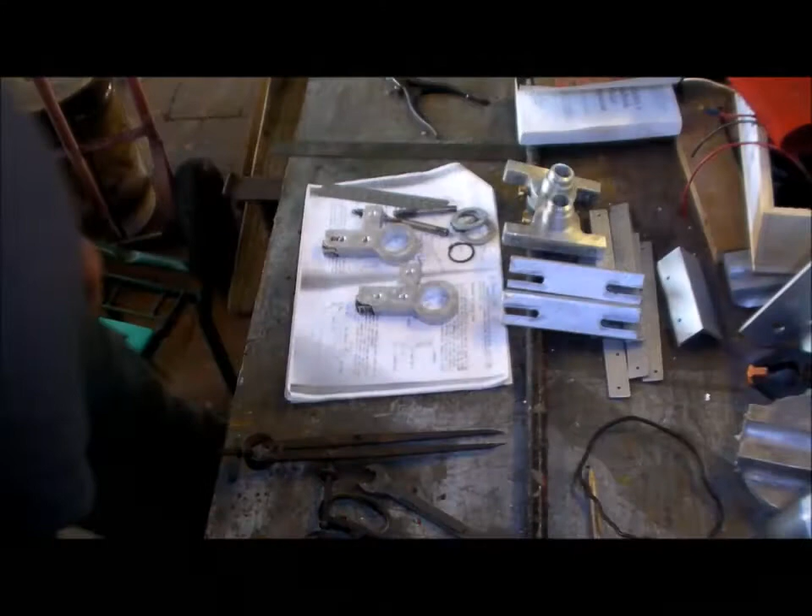Before we go on too far, these two release cranks, they're not quite finished. So before I go back onto the steel transmission levers and whatnot, I'll go back to these release cranks. First off, the holes. In the drawing here, he has 3 holes. One of them is the centre hole for the bore, and then the other 2 are to bolt this to a faceplate, so this can be bored out. We've already done that, been through that process.

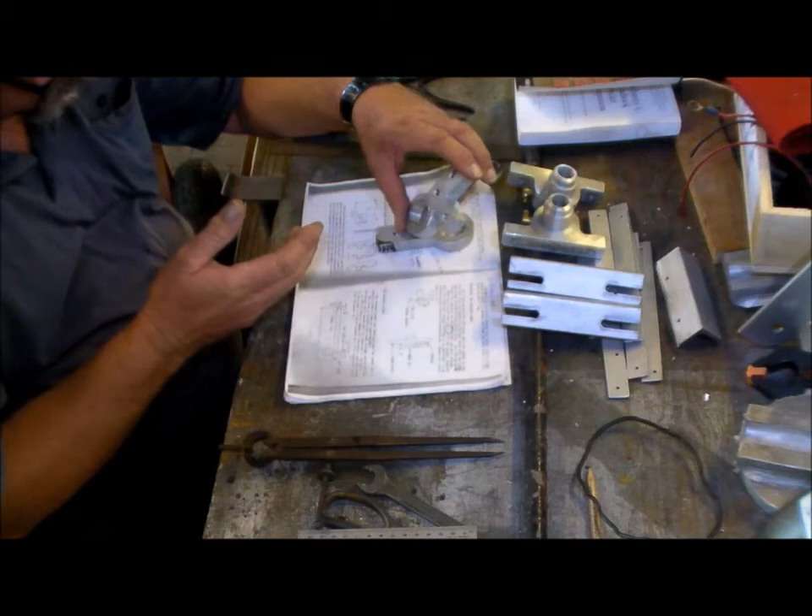What he doesn't show, but he does mention in his text a bit further on, is that there's another hole off to the side of this leg that needs to go in. These are supposed to be 5/16. I've made them quarter because I've got a heap of quarters and I couldn't see a disadvantage of making them quarter. If I need to make them 5/16 later on, then it's a small job to drill and re-tap. So this hole is not in the drawing, so that needs to go in. I put it in at the same time as I did all the other primary drillings, 1/8 drillings. I put this one in.

Now, in the drawing, it has an arrow going to that middle position, and it says tap 5/16. So later on, I think he mentions the other hole at the end is 5/16 also, but remember at this present moment these 2 holes are to bolt it to the faceplate so you can machine it off and do the centre.

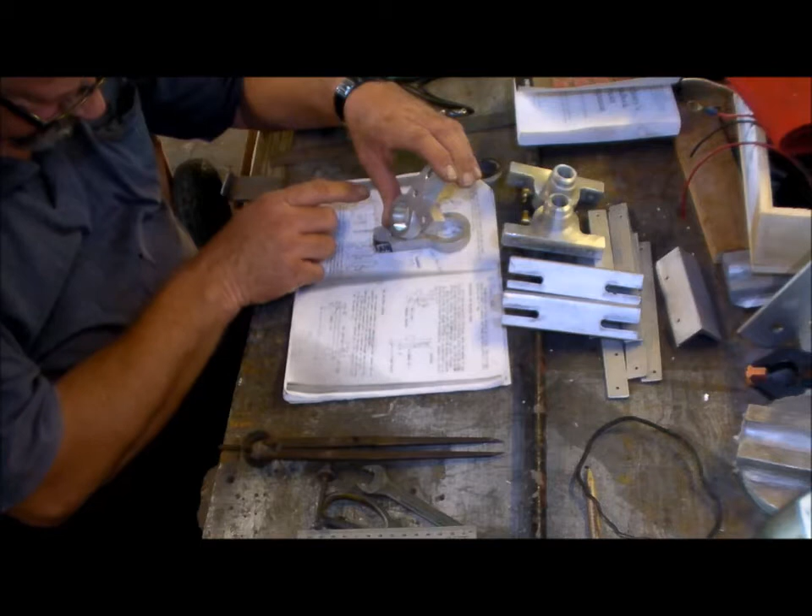But later on he shows that this top hole is going to be 3/8. It's not in the drawings, but it's in the text. And then in the text also he shows the end of the leg being ground off to a 1/2 inch radius so that it can clear, when it pivots, it can clear the top of the angle.

Yep, and that's how he gets the over centre also. There's a pivot here, and then there's a bolt for adjustment here, and then if we're looking at that, can you see that? We're looking at that. It's bolted through this 3/8 hole here. This is the motor frame, we'll say. I know it isn't, but we'll presume this to be the motor frame.

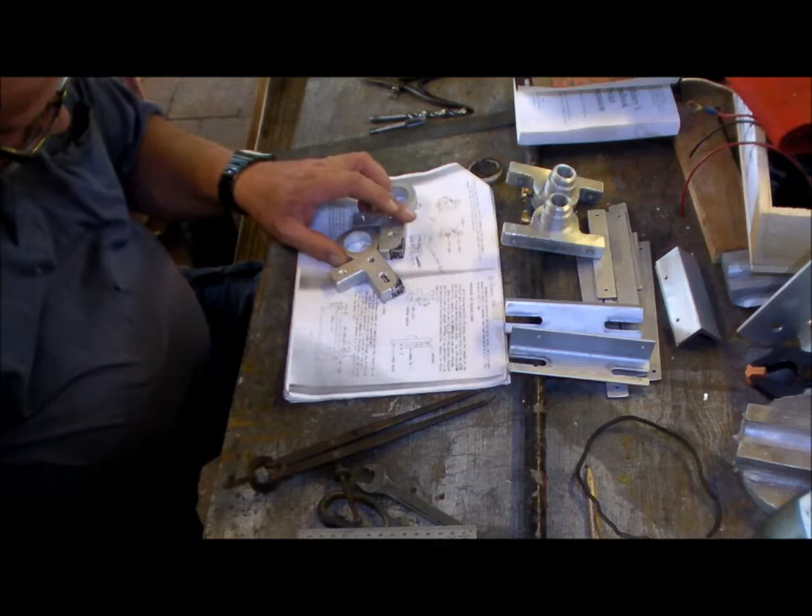So when this lever is moved like that, the top edge has to clear the underside of the motor frame. The reason I'm pointing this out is some of these things are in the text, they're not in the drawings. So realise that these are 5/16 holes, all 3 of them, then at the end, 4 of them, the one here in the middle comes out to, in my case, a 30 mil. These remain 5/16, and then this one goes out to 3/8 for the pivot bolt, and then radius off a 1/2 inch end. Alright, I'm off to file the 1/2 inch radius and take these holes out to, in my case, 10 metric, M10 3/8. Alright, catch you later.

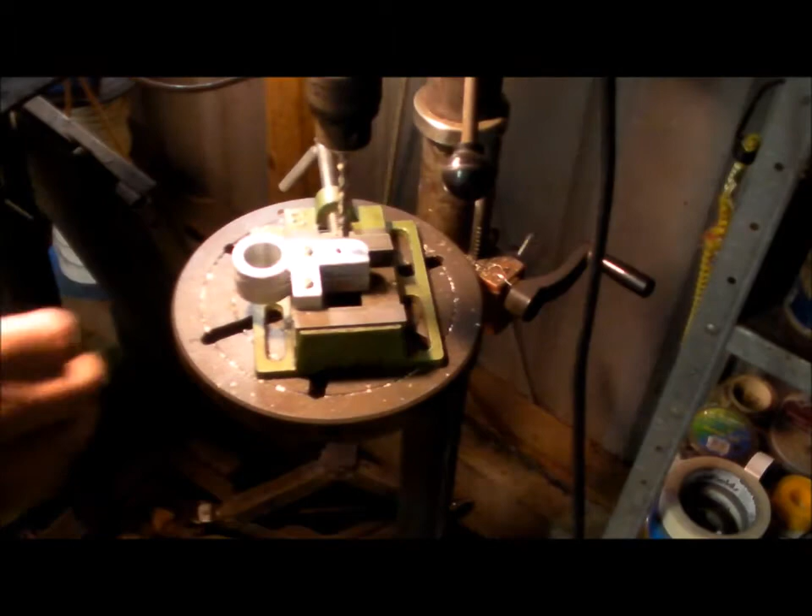Alright, go and check that. I forgot to tighten the chuck. That should work better. Yes, I know this drill is running too slow, just can't be bothered to change the speed. There we go, doesn't take long. That's the one.

Going to try my hand at power tapping, but I think we're going a bit too fast for it, but we'll see. The belts won't do it. I'll go and finish this off in the vise. Okay.

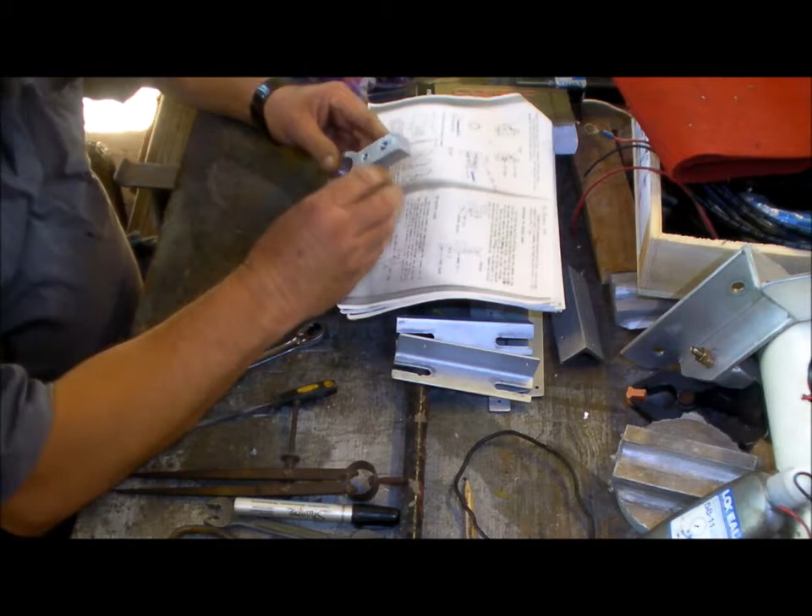I've noticed, well, first thing what I've done is I've radiused the end off and drilled this hole out to an M10 for 3/8 M10. But what's concerned me is that was supposed to be, it's a half inch in. Although I did bring that in half inch. Yeah, 12.5 mil, thereabouts, more 12 mil on that. That's 12.5. But a slight discrepancy here. You might not be able to see that. Try that. Can you see that?

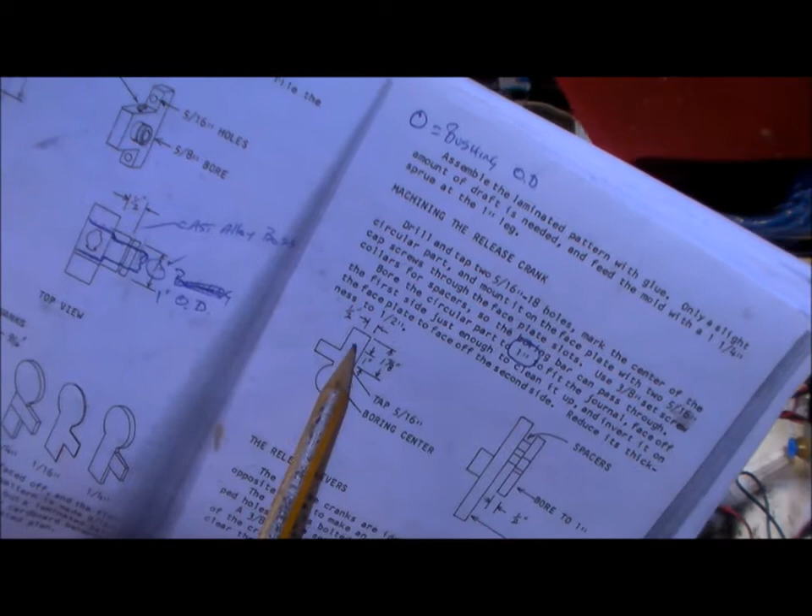Where is it? If you see, that's 1 7/8 inches to the centre hole, and then 1 inch back to the end hole, which should leave 7/8 of an inch there.

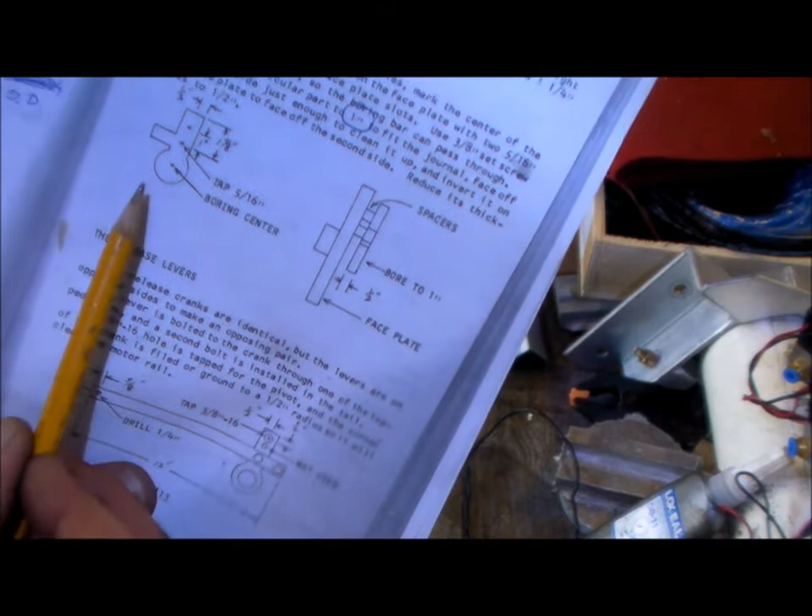Have a look at this end. It's 3/8, 16, that's the crank there, 2 holes. So it's mirror image of the other one we just saw. The end hole is 3/8, 16, half inch in. We're referring to the radius now, I suppose, and then he's got a half inch down for that radius. Well, that hole is 7/8 from the end, not a half inch.

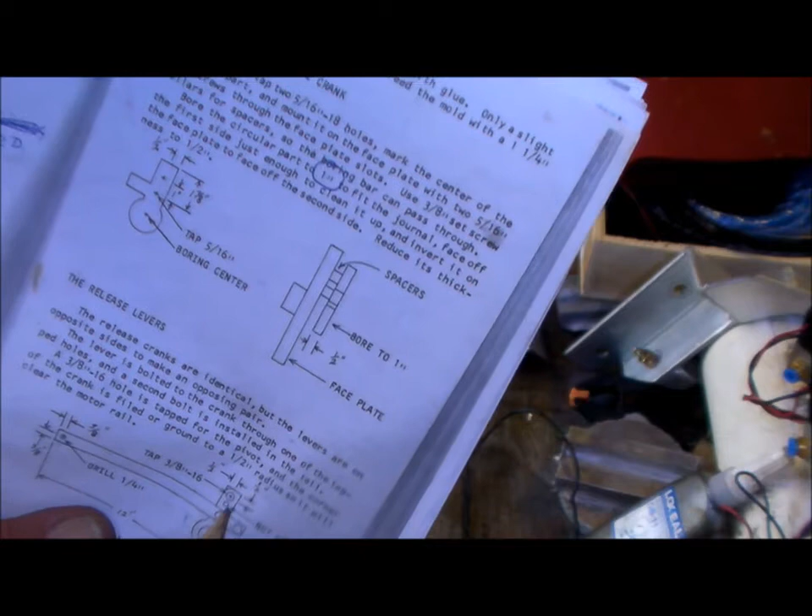So that's a fair bit of difference. So 7/8, that's 3/8.

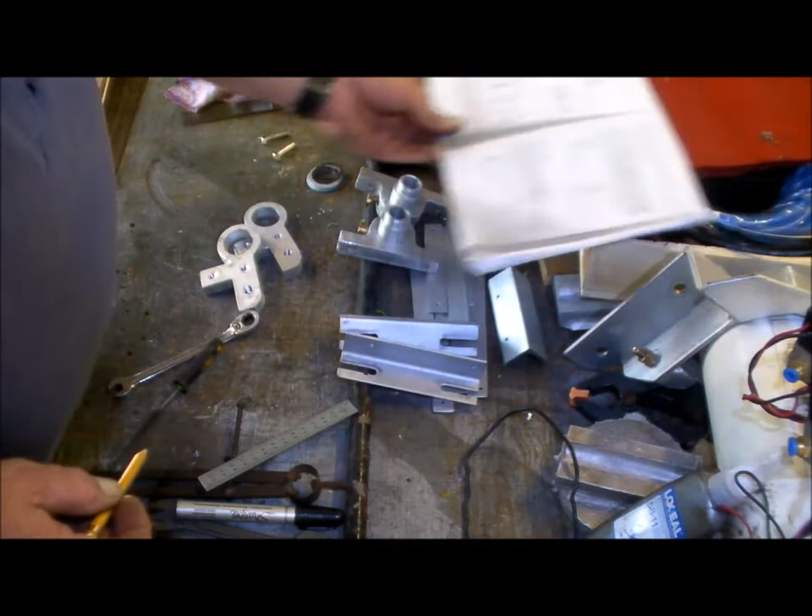I might leave it to see how it clears with the motor rail. If it doesn't, then it's an easy fix.

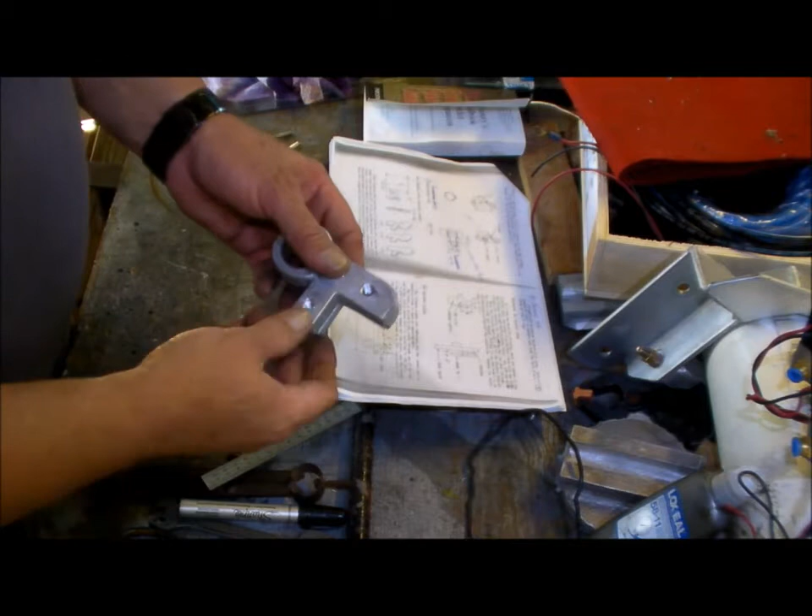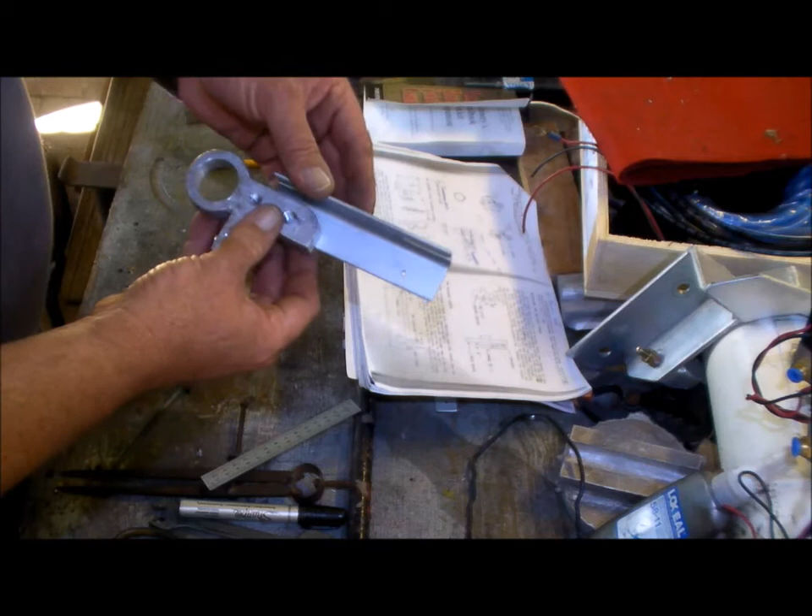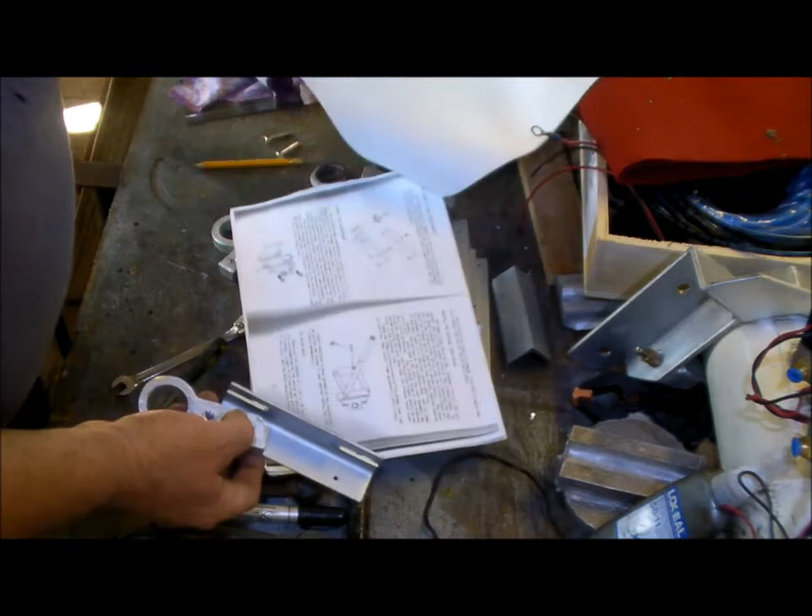Where are we? Come back again. Yeah, as I think I may have explained in the last video, the transmission rail will come in something like that, and then this pivots. So depending on the position for that, which is half inch up, 1 inch in.

Let's have a look quickly. Half inch up, so that's 12.5 mil, 12.7 to be precise. 1 inch in is 25.4, going to be about there. So that's going about there.

Not going to fit. It may, I don't think it will fit. Well, it's definitely not going to fit at an angle like that, but I don't think it's going to go anywhere near an angle like that. Currently it's going to go to about there, to about that angle. Now that's enough to loosen the belt off.

So I'll see how it goes. If I don't like it, I can always trim the back end of that off, I think. Well, I can, but whether that's going to work with the rest of the build, I don't know yet. But we'll plod along as it is at the present moment. The other measurements are right, so we'll see how that goes.

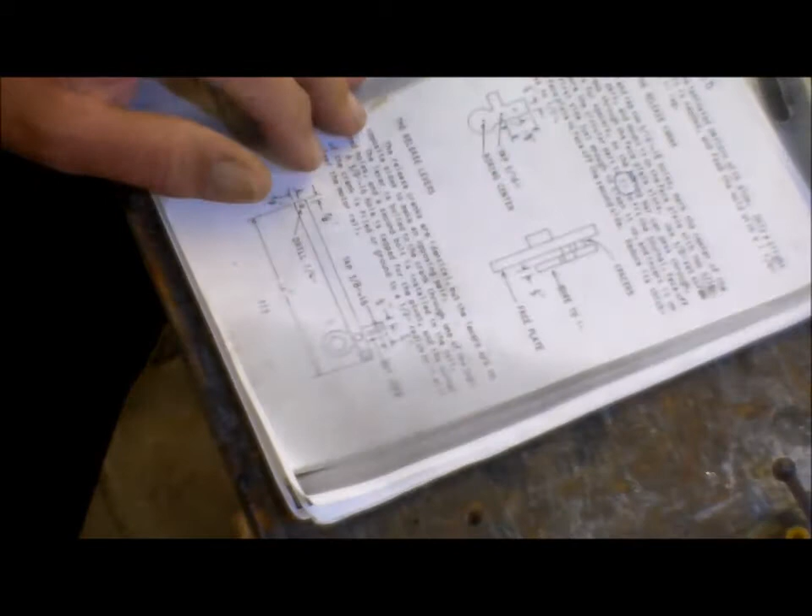I feel, I reckon, start again. I find a discrepancy in this, in the book, working on these release cranks.

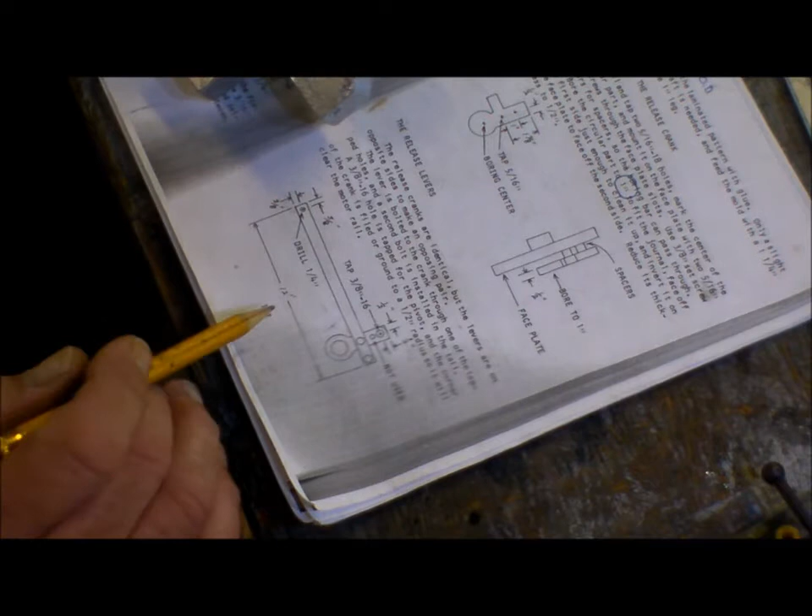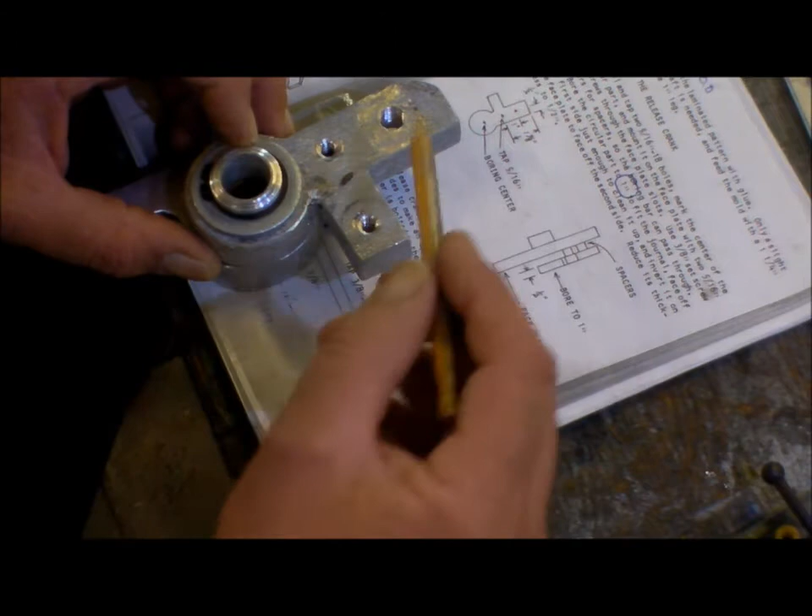The radius that is showing here, this radius here, is, well, it looks like he has it coming in at a half inch from this left edge. So from there, from that side, half inch in, and looks like a half inch down, which gave me a reference point of here.

But having said that, okay, I'll go along with that for the present moment. But up here, this crank, the measurement for the middle hole, this one, is 1 7/8 down, and then the pivot hole, which is the one above it, is 1 inch up, which leaves 7/8.

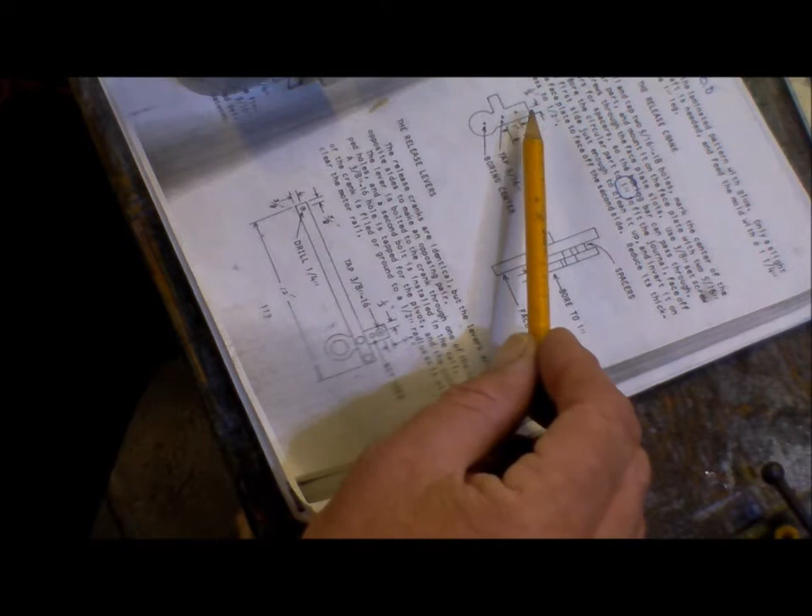Now that's going to be, and this leg is 1 inch wide, so the hole is in the centre of the leg, and so that's half inch, which means this hole is in the middle of the leg, half inch, and 7/8 down from the end.

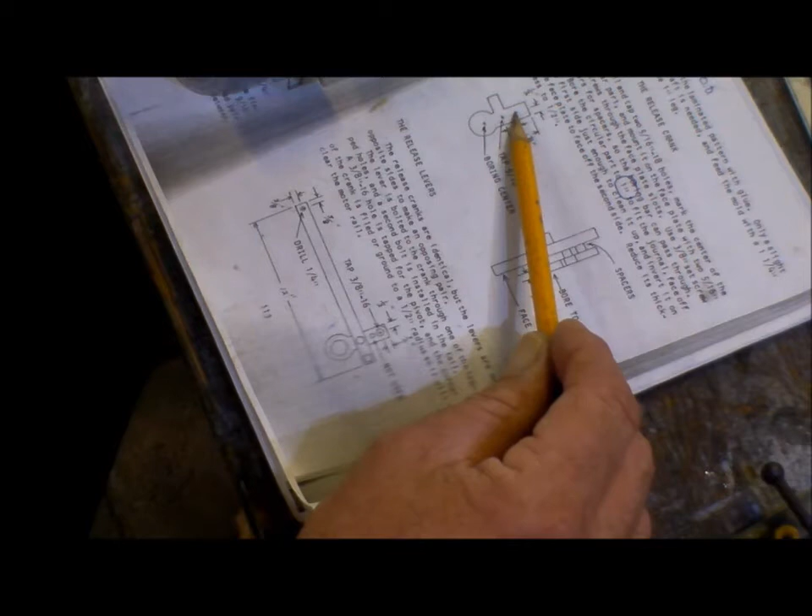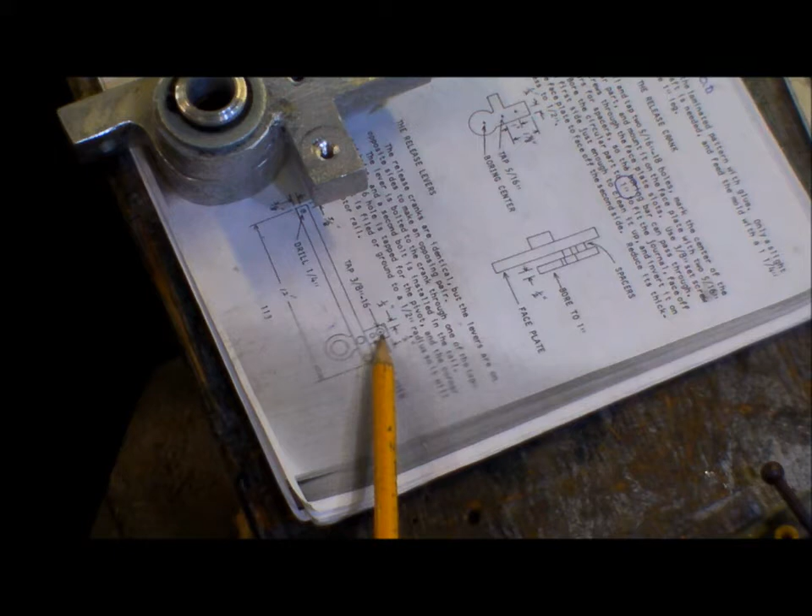But the radius that he wants is half inch by half inch. Well, we have a 3/8 of an inch difference, and if you see here, it looks like the radius is from the drilling position. So we have a 3/8 of an inch discrepancy in this part here.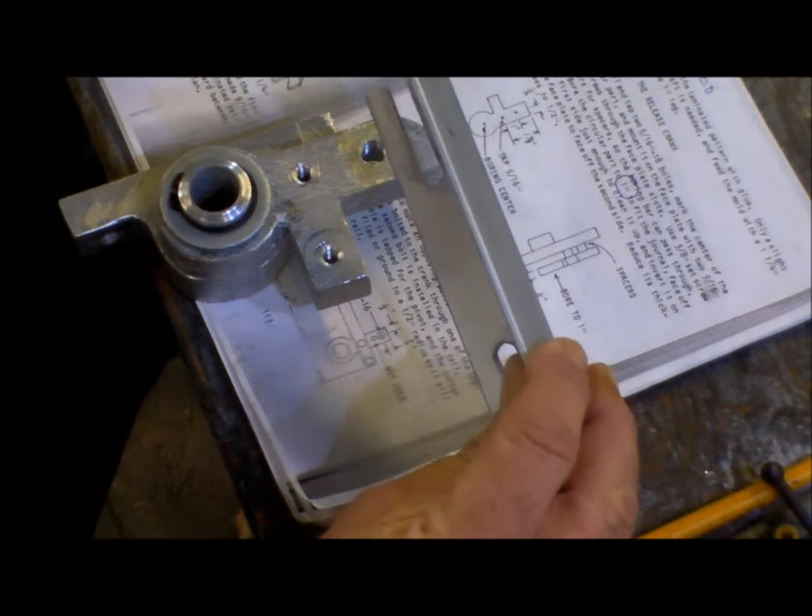Now, this isn't the motor rail, but this is the material of the motor rail, and the pivot point for this bolt is half inch up from the bottom edge, and that slot is a half inch up from the bottom edge. And the motor rail, it's going to sit that way.

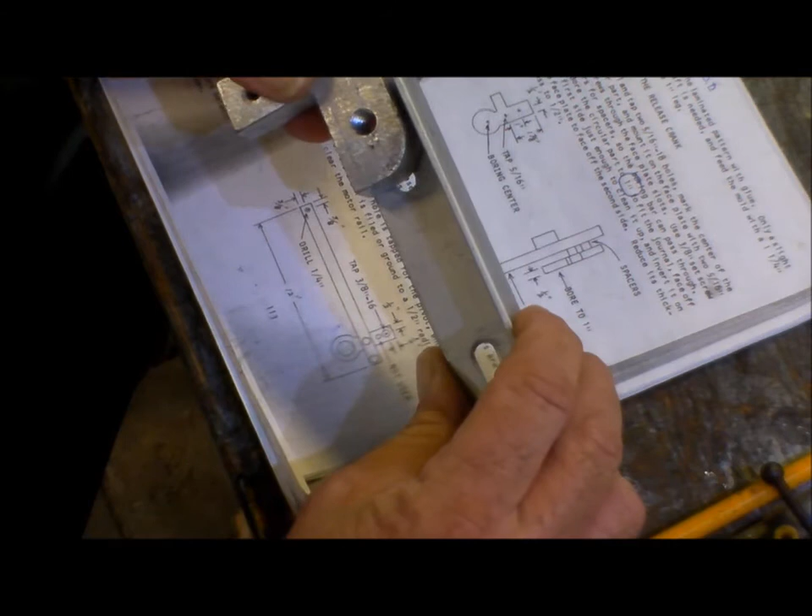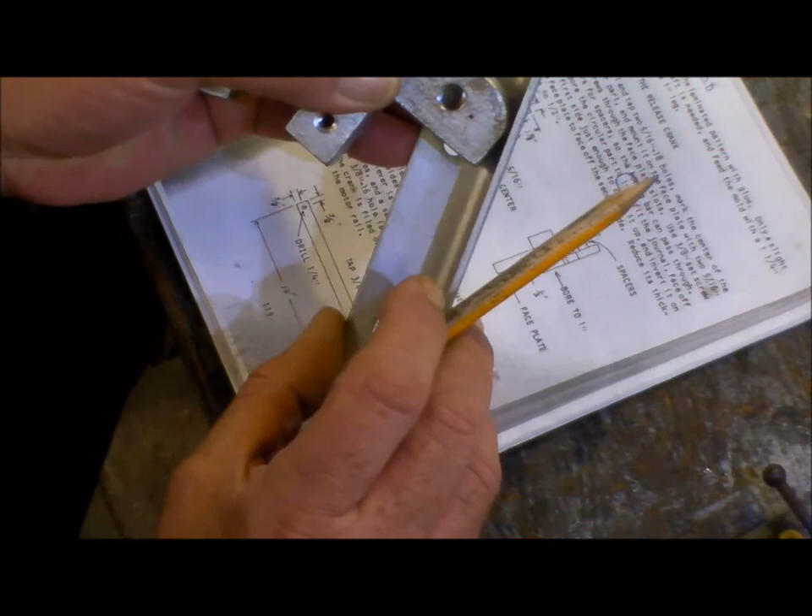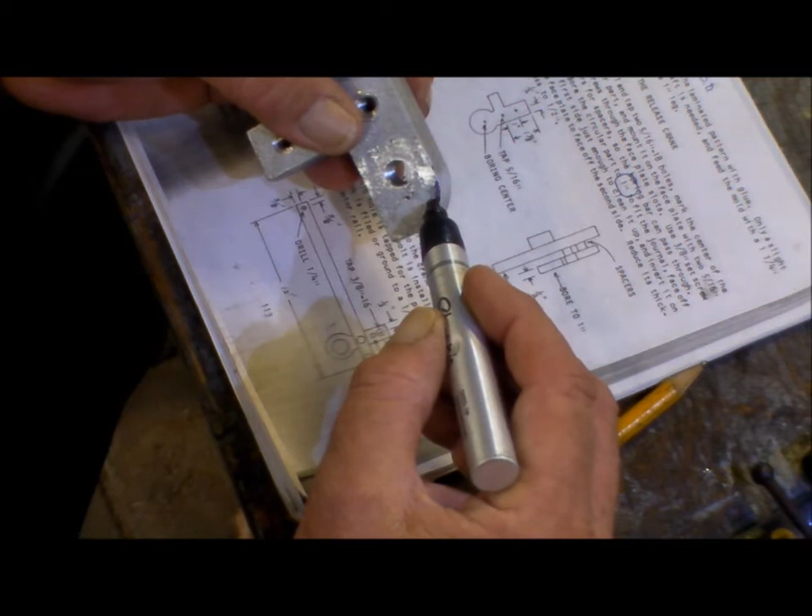So clearances we have, not a problem, that will work, but once that pivots, this hole is no way going to line up with the hole in the motor rail. It looks like this has to be brought back to half inch, brought back to about there somewhere.

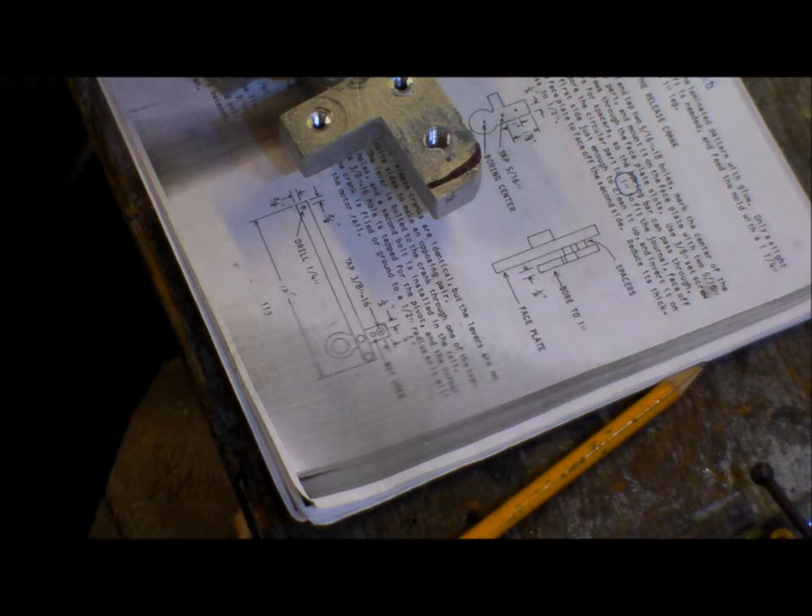Now, that's all right, it's easy enough to remove the material, but what I'll do for the moment is I'll leave it as is, and I'll continue on with the transmission, and when this goes to get fitted up to the motor rail, we'll see what happens. If it doesn't clear, we just chop it off. I don't think it's going to cause any problems to chop this off anyhow. I can't see any problems at the present moment.

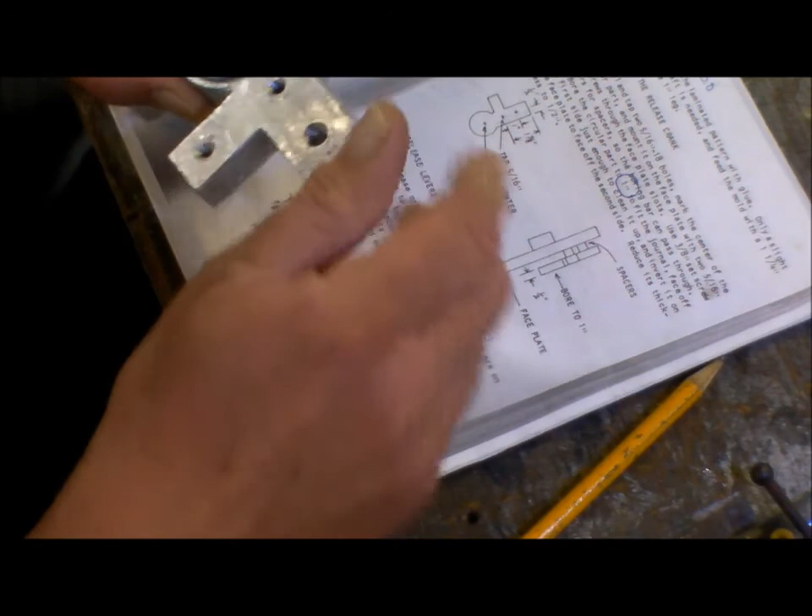So we'll continue on, but we've got a discrepancy happening there.

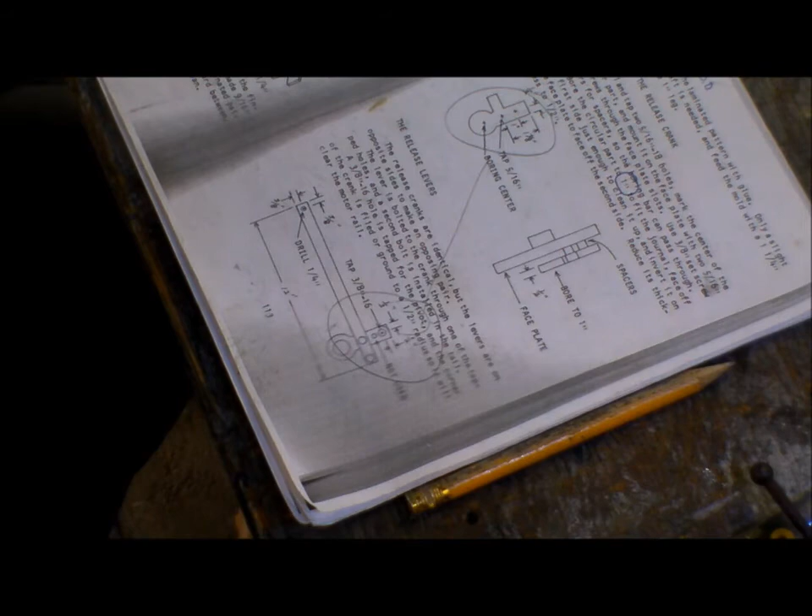Pretty good. We're up to page 113, and I think I found one other discrepancy in his drawings. So we're doing well, just need to be mindful of some of these things. Okay, that'll do for now.

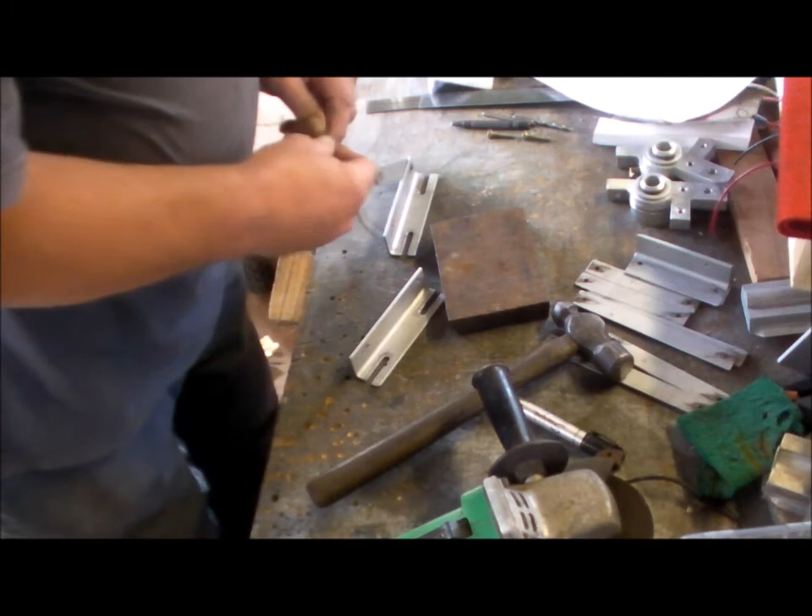I've got some base material to use as a cold rivet for these hinge points. They're just 4-inch nails.